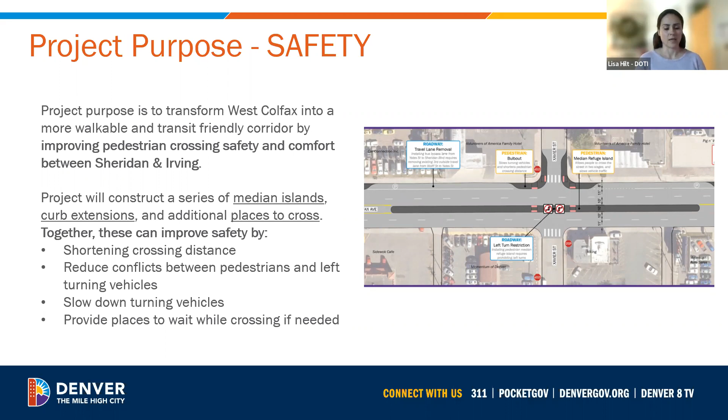All right, thank you, Lisa. Just double checking. Okay, did you want me to cover this slide as well? This was not one of the safety slides. Sorry, Mike. Yes, I thought you were gonna go over the... I'll take it from here. I've looked at it, so I can handle it. I'll take it. Sorry about that. All right. Yes. Thanks, Lisa.

My name is Mike King, and I'm on the Vision Zero team here at DOTI. And for those that don't know what Vision Zero is, it is the goal of zero fatal and serious injuries on our streets by 2030. I'm sure you've seen the logo down in the corner there on many of our projects. And this is a project that is very much a Vision Zero project.

Right now, this area is rapidly growing and past community plans have called for a pedestrian-friendly walkable Main Street. Those being the NTMP projects, which are the neighborhood transportation mobility plans, and then the community transportation network projects as well. A lot of these area plans really focusing on West Colfax as a major connection for the pedestrian network. We know that there's schools, senior housing, residents, businesses, all located along this corridor that does generate pedestrian activity, as well as other roadway users.

And again, West Colfax is a part of Denver's high injury network. High injury network being where 50% of our serious and fatal crashes happen across our city, while they only represent 5% of our total mileage across the city. So very big difference there. And then just a couple quick stats here, and then we'll get really into the meat of the crash analysis.

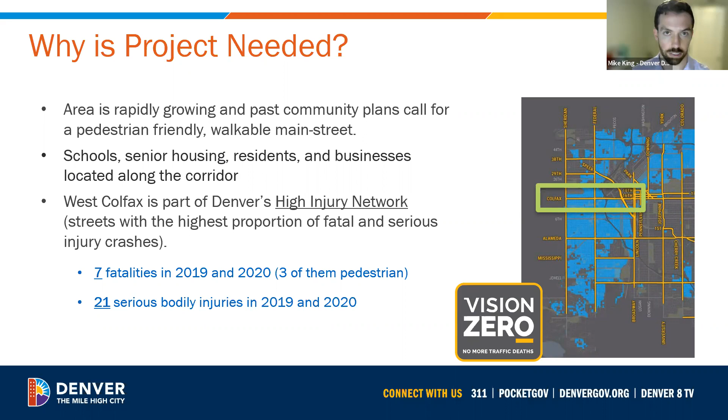So there's been 7 fatalities on this corridor in 2019 and 2020, 3 of them being pedestrian, and then 21 serious bodily injury crashes in 2019 and 2020. And what a serious bodily injury crash is, for those that aren't aware, are crashes, or injuries, I mean, that usually result in hospitalization.

So again, this being a pedestrian project, we always want to make sure that we're focusing on pedestrians first on this type of project, but we also look at all roadway users. This slide particularly focusing on the pedestrian crash map over the last 10 years. And you can see there's been about 25 serious bodily injury crashes that involve pedestrians across the entire corridor, as well as 5 fatal crashes.

Typically, when we do Vision Zero projects like this, if we see a specific intersection where there is a big issue, we would do a spot treatment. But because this is a full corridor trend where there's really almost a crash at every intersection, we want to do a full corridor analysis and a full corridor improvement.

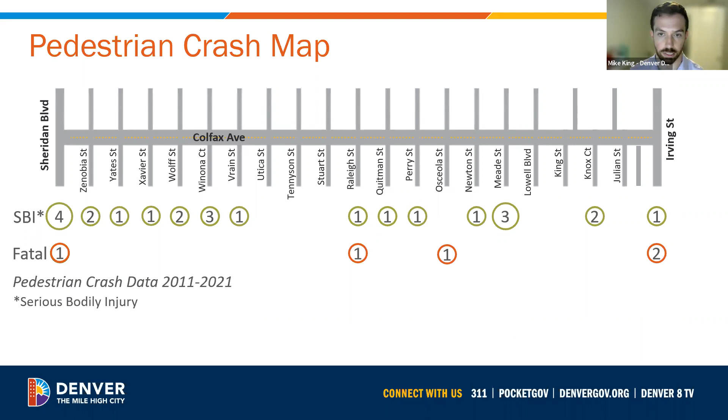And then looking again at that larger crash picture, so not just pedestrians, in that 2019 and 2020 window, there have been 131 total correctable crashes. And a correctable crash is something that we could do engineering wise that would eliminate or reduce this crash from happening in the future. Of those 131 total correctable crashes, we've seen 12 serious bodily injury and fatalities in that window, which gives us almost a 10% rate of crashes resulting in serious or fatal injuries.

That is by far the highest rate in the city. Second is Federal stretch that we're doing a lot of projects on, and third is along, sorry, Broadway, not Colorado Boulevard. But just to break down this project specifically, there's been 94 vehicle-to-vehicle crashes, 14 pedestrian crashes, and 3 bicycle crashes.

I think this is our final slide for the crash picture, and then we can open it up for some questions if there are any about the crash picture. This is just a snapshot of the specific stretch of the corridor. We do an analysis like this for all of our projects prior to determining what the best design treatments are. And as you can see, we'll start from left to right, just what the crashes were that occurred in this stretch from Stuart to Quitman.

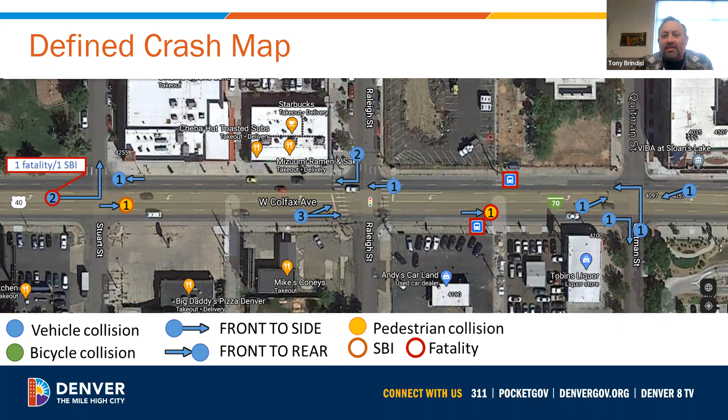Just in the interest of time, I'm going to move us on to the next slide, because I know we have a lot to get through. Shane, did we answer your question? Yes, thank you. I need to unlower my hand now. Okay, thank you. All right. Mike, are you continuing? I'll pick back up. Okay, thanks, Lisa. Thank you, Mike, and sorry for putting you on the spot there. You did great.

So I just want to go over our timeline for this project again and just remind everybody, this started planning back in June of 2019. We had public meeting number 1, came out to the community to present the project, got some feedback. We developed a concept design in the middle of 2019. Came back to the public again in September of 2019 with another public meeting, got the remaining feedback, which was the basis for starting this project we're going into now.

In 2020, we got our remaining funding. So originally, our funding for design has come from the Elevate Denver Bond Initiative. Back in 2017, Denver citizens voted on funding a safety and transit project along West Colfax. So that's where funding came from through the Elevate Denver Bond Program. And then in 2020, the remaining funding is being contributed by CDOT and their Safer Main Streets initiative. We applied for a grant and we got a match from CDOT. So another partnership going on. Thank you, CDOT. We started our engineering design in 2021.

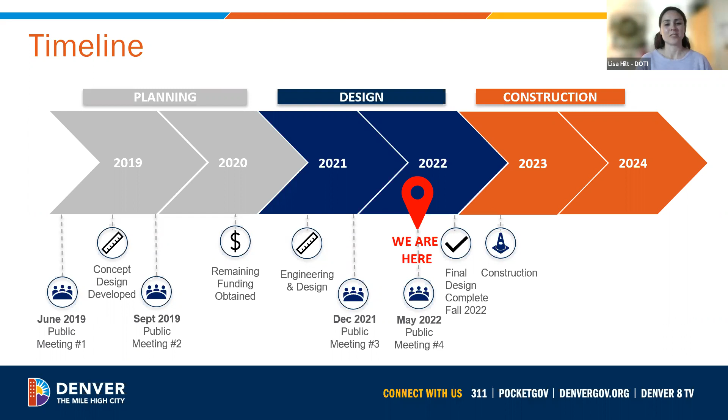This kind of put a little bit of a wrench in the Vision Zero project, and Mike's going to talk about that more later. Just the timing of the 2 projects kind of doesn't quite line up now with our expedited schedule. It's great for the project, but it kind of put a wrench in our interim project.

So our key public input that we heard from you all is you had some concerns about pedestrian crossing safety at Corky Gonzales Library, the Colfax Elementary, Newton and Vrain Streets. So I want to point out at Irving Street, we're adding the bulb outs at Irving. The project ends at the west side of the intersection of Irving and Colfax, and we're adding bulb outs there to help lessen crossing distances. So that should improve safety.

Our other group had implemented LPIs already, lead pedestrian intervals, at the traffic signal intersections. So that means that the signal turns red, we get the walk signal for pedestrians to cross, and it takes a while for the green light to turn. So everybody that is walking has some lead time to start going across the street. That helps vehicles see people more clearly and makes those intersections more safe. We're also adding bulb outs at Newton and at Vrain.

And we have talked about this at length, the signal decision at Meade and Lowell. During the planning phases of this project, the community asked for a signal to be moved from Meade to Lowell. Our data doesn't support a signal for Lowell at this time, but that's something we're going to be monitoring. And Nancy's going to talk about that more later on in this presentation, so I'm going to leave those details to her.

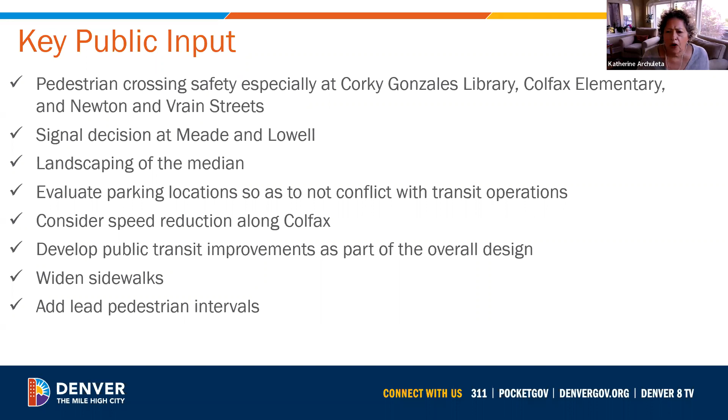Lisa, there was a question from Jerry about left-hand turns allowed at Lowell. It might refer a little bit to the conversation earlier, but maybe you could address it now. I was just going to say, we have a slide on that later, Katherine. Okay, great. Perfect. I'll address a few of these comments at that point in time, and then we can always go back to them if we don't address it in enough detail. Okay, and thanks, Shane, for your comment on feeling really great about the landscaping.

Yeah, I just had one question about the process. Of course, there are a number of things you've done over time that have been responsive to things coming from the BID and its members. But one of the things that we had asked for or wanted to know about was having those, I don't know, speed indicator lights or signs that tell people how fast they're going, just that instant recognition that you need to slow down. And I just wondered if those had been incorporated as part of your design.

Thanks for the question, Dan. I think we've covered this maybe before. Those are not part of our design, and I believe that's something that has to go through DPD. Maybe Tony can speak more on this. I can speak a little to that, Lisa, probably not too in depth right now, just because it hasn't been part of this discussion, in this design at this point, anyway. There is a process to go through.

DPD essentially has to make certain requests kind of in alignment with the red light cameras on CDOT right of way. Certain things right now aren't really allowed, like the feedback signs, Dan. They're the speed feedback signs that pick up your speed with radar, and then they start flashing, they're set at a certain level, then you see red and blue lights come on. We don't really have those right now. We haven't been approached recently about that. So it probably wouldn't be a part of this project, but probably a separate discussion after the fact, if it's something folks wanted to entertain, but it does have to come through the city and DPD, as Lisa mentioned, to CDOT.

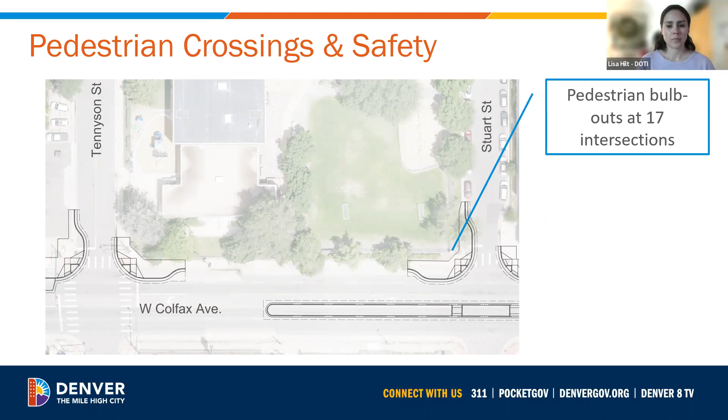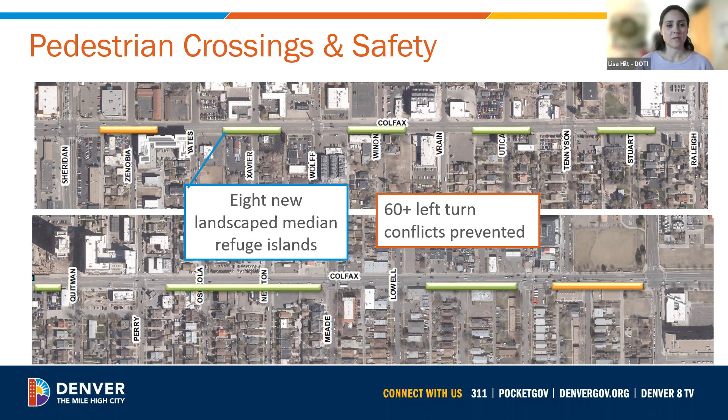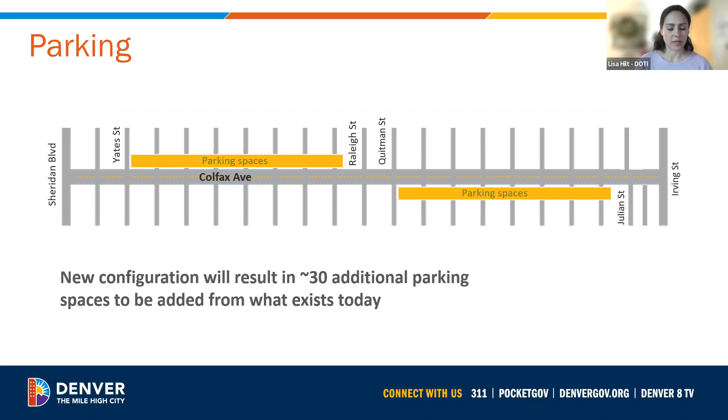We are adding 8 new landscaped median refuge islands. With this, we're preventing over 60 left turn conflicts between pedestrians and vehicles. So this is a great safety tool. We'll also be adding about 30 additional parking spaces from what exists today. You can see it starts on the north side from Yates to about Raleigh, then there's a transition, and then we have parking spaces on the south side. So we'll be adding parking to the area, and I think that will help people get to where they need to go, and businesses as well. Added parking for businesses.

There was one question that Kathleen had that may be relevant to this slide, Lisa. She's asking if there will be relocation or removal of RTD shelters that are no longer bus stops, and is there anything being done to ensure businesses are diligent in removing snow from sidewalks during the winter months?

Sure. As far as RTD shelters where we're consolidating bus stops, yes, I believe those will be removed. And as far as diligence in having businesses... Go ahead. Yeah, I just wanted to interject on the bus shelter. Those are all actually business improvement district shelters. So we've been coordinating with property owners and RTD and the city and Riley to move them.

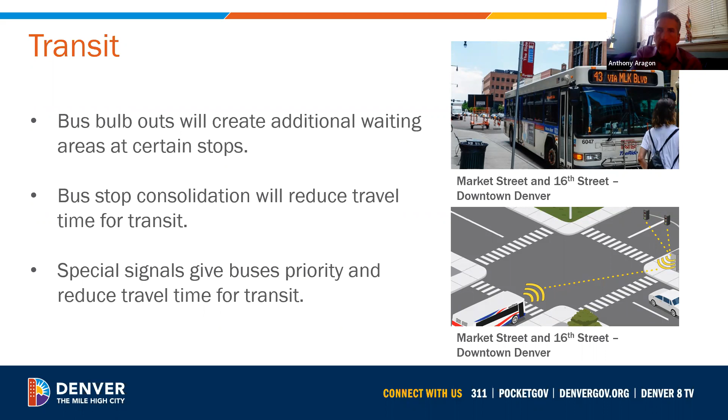So the question was, how does parking work with BRT or regular movement along the outside lanes? On the side of the street where there is the parking, the bus is able to stop at one of the bus bulb outs and not have to pull out of traffic, and so that reduces delay. Transit operations see delay when they're having to pull out of traffic and then pull back in. So the bus bulb outs will benefit that.

As far as BRT, which stands for Bus Rapid Transit, right now what's being done as a part of this project are improvements to make transit quicker. It's not full bus rapid transit yet. That is something that's planned for in the future. And when that does happen, it would likely remove one of the travel lanes, similar to what's happening on East Colfax, so you would have a vehicle lane and then a dedicated lane for the bus operations.

And on the snow, I just want to jump in, because one of the reasons that the on-street parking was moved and shifted, starting at Perry, was to actually mitigate the splashback onto the businesses on the south side of the street. It really becomes hard if you're one of those business owners to keep it ice free when there's splashback.

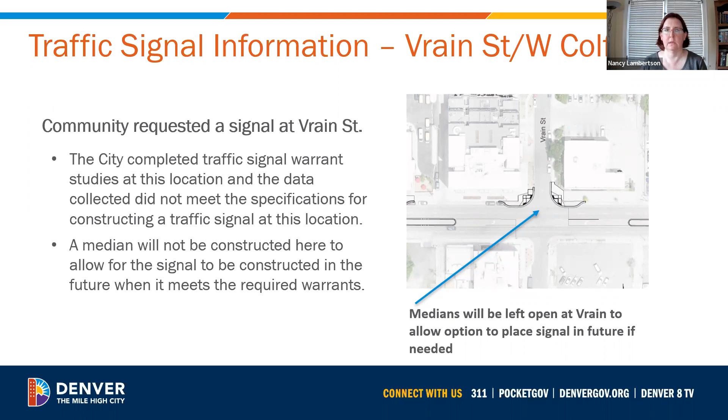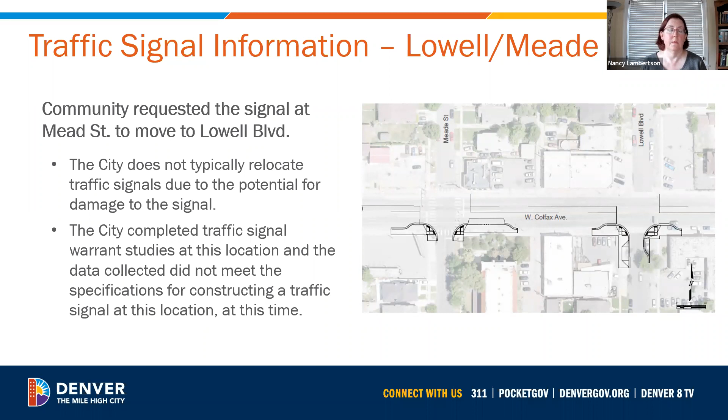Same thing at Lowell, same issue as at Vrain, where in this case, people were asking to relocate the signal from Mead to Lowell. City typically doesn't do that because of the potential to damage the signal. Once again, it did not meet warrants, but DOTI is committed to monitoring these locations to see in the future when they should be installing signals. So we can go to the next slide.

One change, after talking with CDOT, after our 30% design and some safety concerns we'd identified, we will have a median installed at Lowell, and I believe, I'm looking for the name, someone asked earlier about being able to turn left. So Jerry did. This median won't prevent DOTI from constructing a signal when the warrants are met. You will be allowed to turn left off of Colfax, either go northbound or southbound onto Lowell, but you will not be allowed to turn left from Lowell onto Colfax. And so this is a change.

One other thing I wanted to talk to that's shown a little bit, and Sherry, maybe if you can just highlight the south side of the street, you'll notice that those curb and gutters look a little wider than maybe what we were showing before. After a lot of conversation with CDOT, who's been a great partner in this project, making sure we had the appropriate lane widths for buses, but also that we could fit in landscaping.

One design change that's a little different from what we were showing before is that on both sides where we're putting in bulb outs, we'll be doing those 5-foot gutters, and that's what's out there now. That'll provide a little bit better running surface for the buses in those outside lanes, and also give us the lane widths that we need for everyone to be safe, and provide us the width for the landscaping, which, as everyone knows, was a huge win overall for this project.

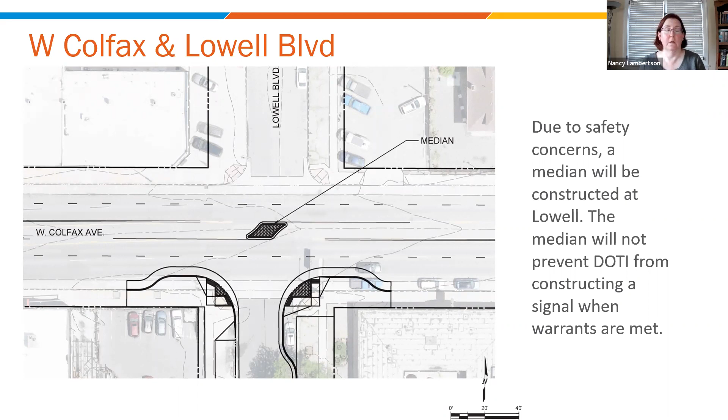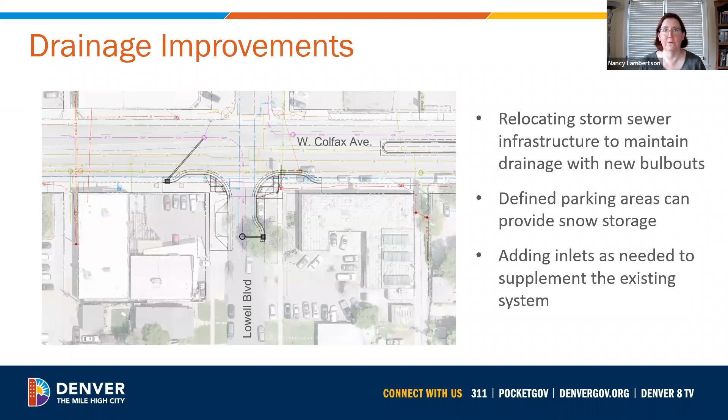Also with the defined parking areas that Lisa was talking about earlier, we'll provide some areas for snow storage, so that is not then getting piled up on the sidewalk. So hopefully that helps with some of the snow and the icing issues. And then also we're adding inlets as needed to supplement the existing system. Once again, wanting to make sure that we are maintaining the existing drainage and obviously not creating any pools or what we like to refer to as bird baths. So yeah, I think we can go to the next one.

Yes, Colfax and Irving. Another discussion with our partners over at CDOT, and just as you all know, as you go through that intersection now, the lanes don't necessarily line up. And so we are changing that existing median and some of the striping so that the lanes, both in the eastbound and the westbound direction, line up across the intersections. It'll be easier for drivers to navigate and make sure, when they get across the intersection, that they're in the appropriate lane. A couple of cases here. Go back one more. Sorry.

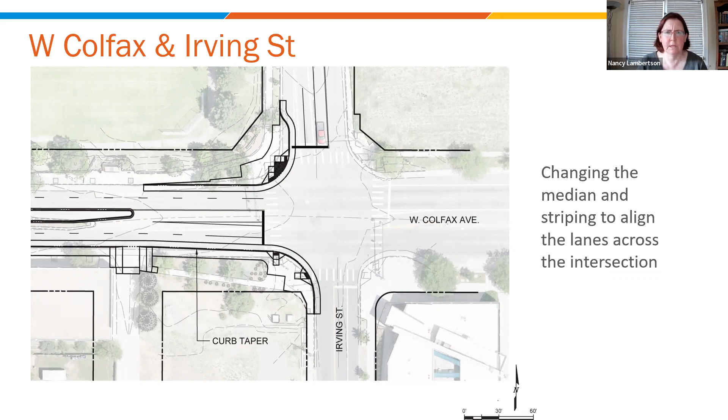This is a case where you can see on the north side we're bulbing out a little bit and adding some sidewalk here, and the same thing on the next slide, Sherry, where we are tapering the median from the north side to the south side. People asked for a little bit more sidewalk in these areas where the tapers are, and so we've pulled the curb and gutter out into the roadway a little bit, providing some wider sidewalks as requested.

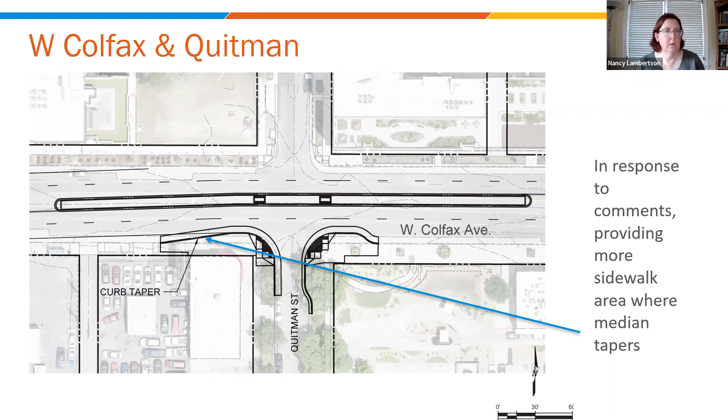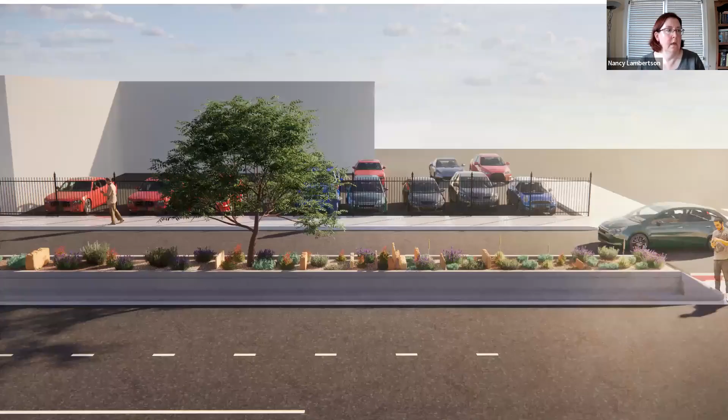It's a wide enough area that you'll feel comfortable standing there while you're waiting for a gap in the other direction. You can see this is kind of a looking down view on what the landscaped area would be. We can go to the next slide, and it shows kind of from the side some of the concepts that we're looking at. Maybe some trees, some planting, and I'm not a landscape architect, so I'm probably getting some of this wrong, but a few stone slabs and treatments like that in the median, to get obviously aesthetics, but also comfort and feel as you're traversing the corridor.

And then I think the next slide, Sherry, shows a little bit. You can see on the left, we have a parking area. You can see that there's a bulb out where there's a little bit more area for bikes and peds to wait. And then the refuge area going out into the median. Hopefully this design process too, going back to some of the comments earlier, by putting in a median, is a visual cue to help slow down the traffic in this area. Once again, knowing that this is a safety project. So I will leave it for a discussion break, but that's kind of a big overall response to the comments we received at our last couple of meetings.

So one of the questions that we're seeing in the chat by several people, Nancy, is the construction schedule and how that will be timed. Is it going to be in segments and sort of what time of day? Can you talk about that? I'm gonna have to default to Lisa. I'm assuming it would be day construction with the residences that are close to Colfax. Night construction can be pretty disturbing in that regard. And as Lisa said, we're looking at starting construction probably early spring of 2023, and kind of a year and a half, give or take, through 2024 is the timeline that we're looking at. But if you wanted to add to that, Lisa.

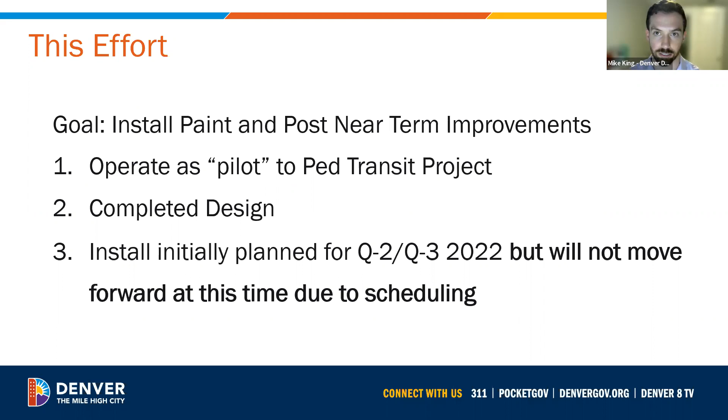And we just made the executive decision that this money was better spent elsewhere, and this money won't just go right back into the full DOTI budget. This will go back into the Vision Zero pedestrian improvement project. So in the long run, this is very much a big win. The longer term project is going in, and we will get to get more projects across the city that are going to help pedestrians across the board.

So just to reiterate that timeline too, obviously we're here in May. We would have gotten this project installed around the September timeframe. Even if we wanted to use it as a pilot, only having 2 months between that September timeframe and final design doesn't really help us that much for the long-term project either. And then once again, construction would start right back up in the beginning of 2023. So to add on to the construction conversation, that's a little bit less construction that will have to happen on the corridor. So all good news in the long run for the most part.

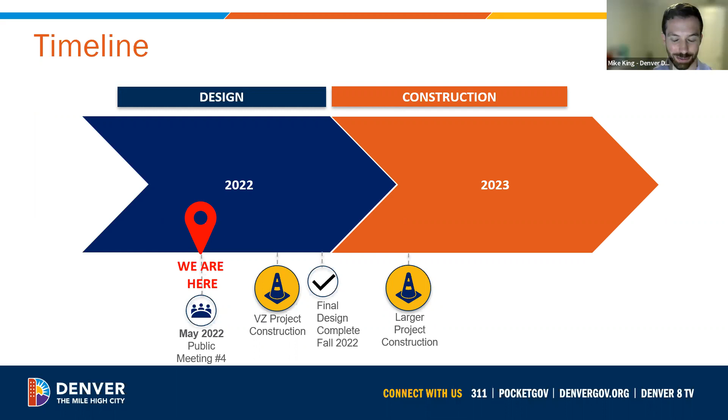Our team was a little bummed at first, but then I realized how great it is that we get this longer term project. So we're very excited to see this project get in sooner. That's all I had. If you want to give any questions, or we just jump right into Lauren. I don't think so. Why don't we just jump over to Stuart Street? Any comments, if you could put them in the chat, and we'll finish up with Stuart Street and then close off with any final comments.

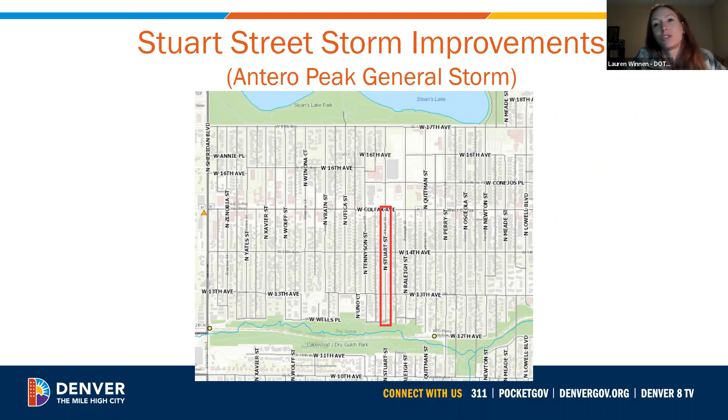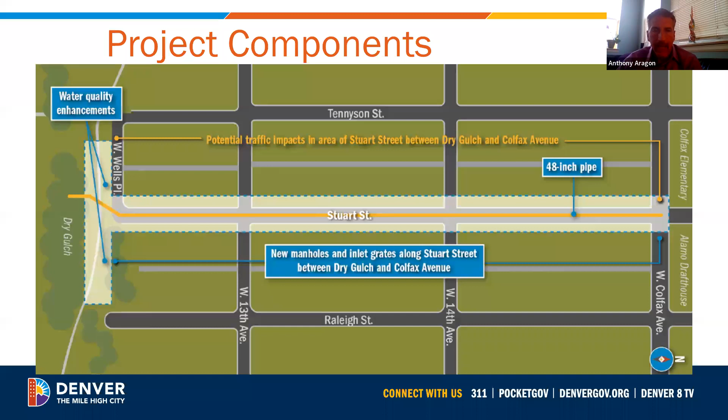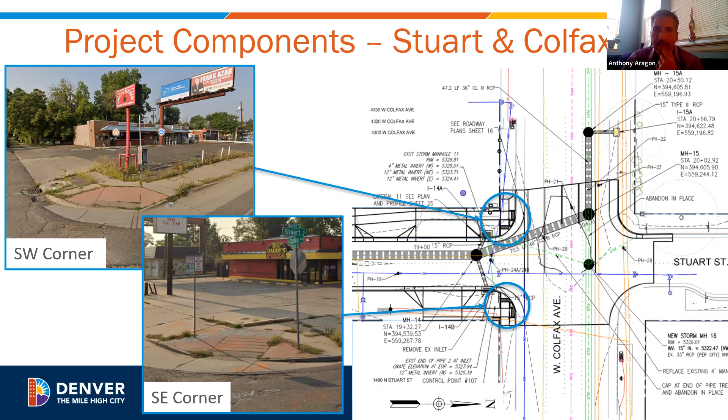Yeah, and also for those participants, we will add this Stuart Street Storm Project on the West Area Projects website. And so it will have its own project page, and you'll be able to keep up to date. But by no means is the June presentation the only opportunity to hear about the project. We will invite Lauren to other CAG meetings in the coming months, as well as community meetings. So thank you, Lauren. Do you want to just keep going, or I know that Sherry's showing the slides, or does it get complicated and it's best just to wait?

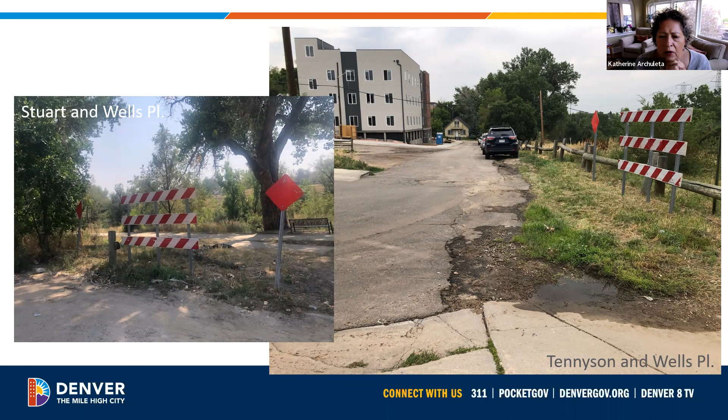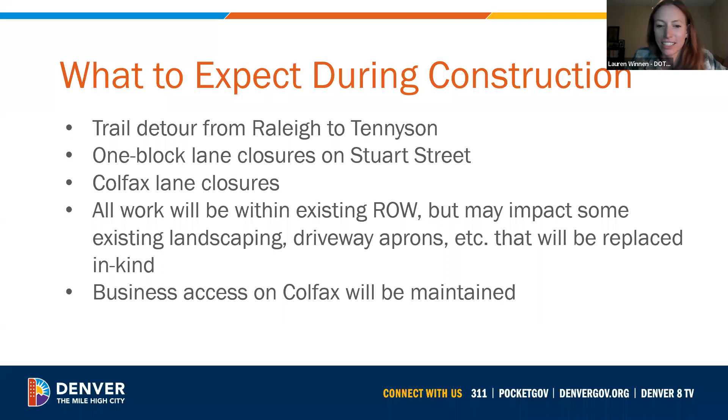Well, it gives a preview of some of the things to come that Lauren's going to be talking about, so you'll not want to miss the June meeting. Yes, I guess it doesn't hurt to go through it. Yeah, we'll provide a more in-depth presentation with Lauren at the June 2nd CAG meeting, but for the community at large, we always want to make sure that you know that you're invited to any meeting that DOTI hosts, which is always the first Thursday of every month from 6 to 7 p.m.

And Andy has his hand up, Katherine. Yeah, sure. Hi, Andy. Hi, just a quick question: if we're not going to talk through the Stuart Street improvement or the drainage stuff today, is the project itself still on the same timeline? I've seen signs and the beginnings of possible closures going up on Stuart Street. When does that project actually start for you guys?

Yeah, so we don't have a contractor on board, and we won't have a contractor on board for a few months. This is a general storm project, so it's packaged with some other locations. We do that for our smaller neighborhood need projects to address local flooding, so that we can put them out to bid together and hopefully get a better price on them. Because of that, the contractor can decide what location they do first, so we won't know exactly when construction will start until we have a contractor on board, which will be a little bit later this year.

But once we have a contractor on board and a schedule, we'll definitely present that to the public. You can plan for a 2023 construction. They'll start down at the south end on Dry Gulch and then work their way up to Colfax. So depending on what part you're interested in, they'll do one block at a time closures of Stuart Street. Does that answer your question? Yeah, thank you very much.